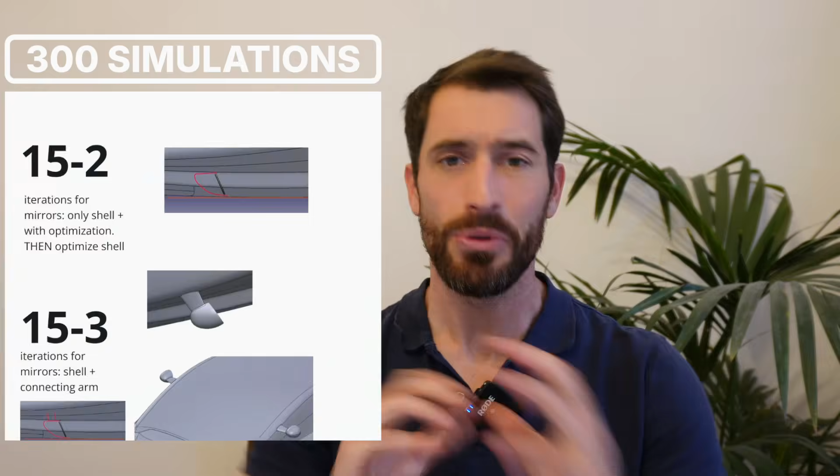Hi everyone, this is probably the most in-depth video you'll ever see on how to cut the aerodynamic drag of a car. We ran almost 300 simulations together with Zweig, a German manufacturer of three-wheelers.

We're going to divide this video into 4 distinct phases. First of all, the hangover: we woke up, we looked into the mirror and we saw that the existing design was actually really bad in terms of aerodynamics, and we were not going to get the range that we wanted. Phase 2, applying makeup, trying to tune and squeeze the existing design to get some drag reduction out of it, but we concluded it's not going to be worth it, we need to go more drastic. So phase 3 is a complete facelift: take this off, put a new one on, and then start to make proper progress.

And then the 4th phase is really nice. We're going to talk about not just the external looks, but also about the inner side of ourselves, and realize that we also need to look at the flow distribution inside to have a good ventilation system.

Now, before we dive in, why are aerodynamics so important? Well, if you are driving at highway speeds, around 70–80% of the energy you're using, whether it's a combustion engine or your electric drivetrain, is to just push air out of the way. So if you can cut the drag by 30%, you can actually extend your range by about 20%. Isn't that massive? It definitely is. So let's dive in.

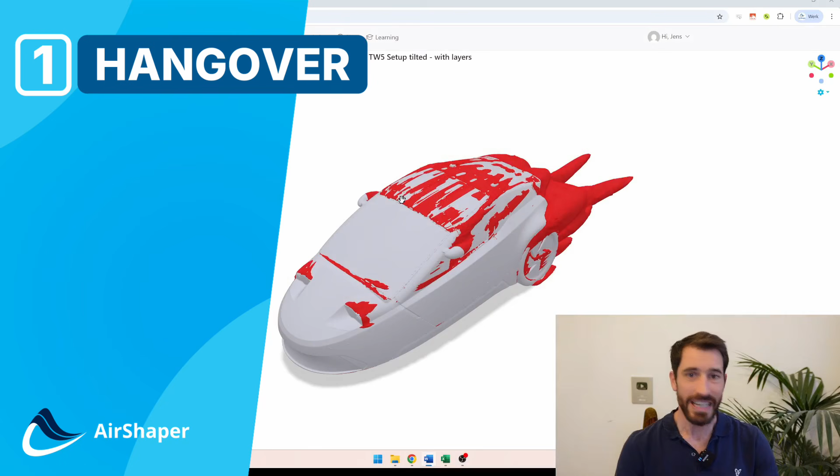So this is phase 1, which is the hangover. We went to a party, we thought our design was actually already good and sound, and then we looked into the mirror, ran an analysis on AirShaper and concluded, oh, this is actually not as good as we had planned. This has a drag coefficient of 0.311.

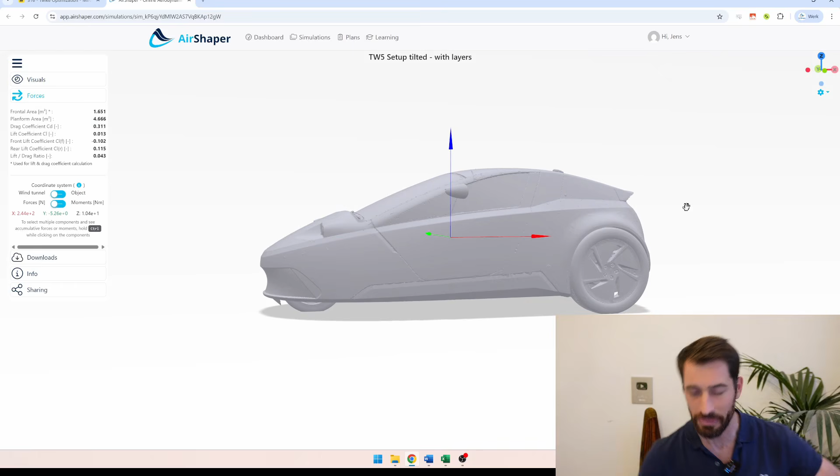We thought, well, this is a wedge shape, it should actually slice through the air quite nicely. It has only 3 instead of 4 wheels. What can go wrong, right? But in terms of aerodynamics, a lot of these things are in the details, and something that can look aerodynamic, like an old Volkswagen Beetle that we tested on this channel as well, can actually be very unaerodynamic due to small changes, due to things sticking out and so on.

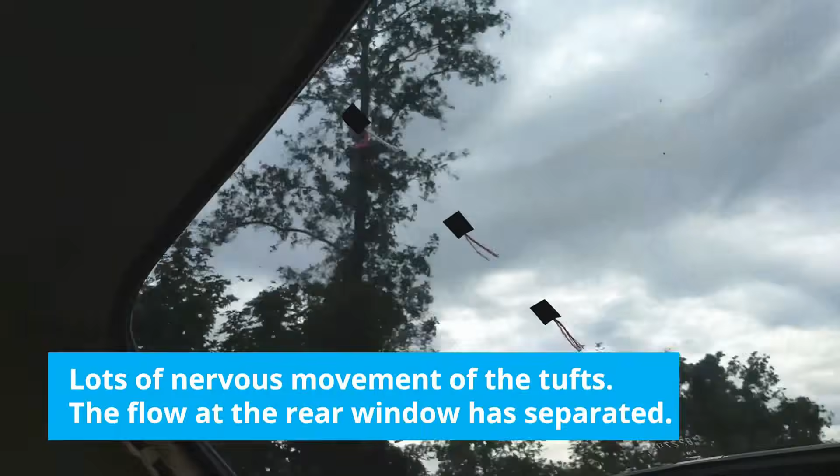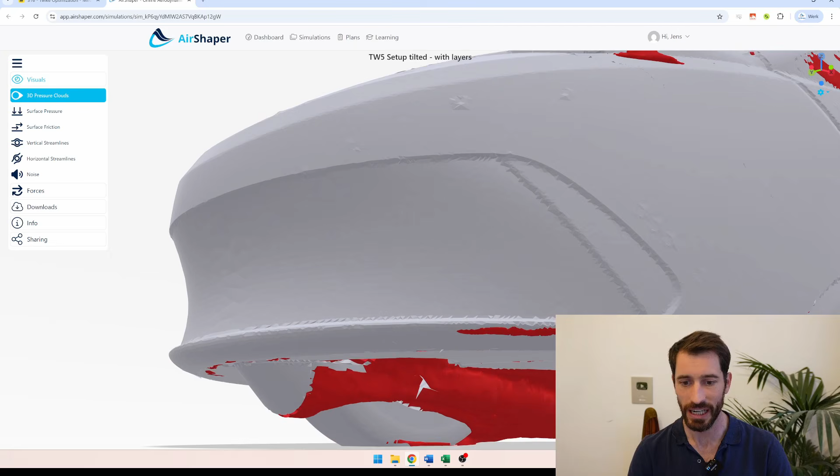So let's dive into the details of this phase 1 and analyze why this is actually not as aerodynamic as it looks. So at the front, we have the front wheel here, and we can see the front splitter. The front splitter is actually quite sharp here, so the air hitting the front and then needing to dive underneath here, this creates flow separation. Not a massive problem, but this can definitely be optimized.

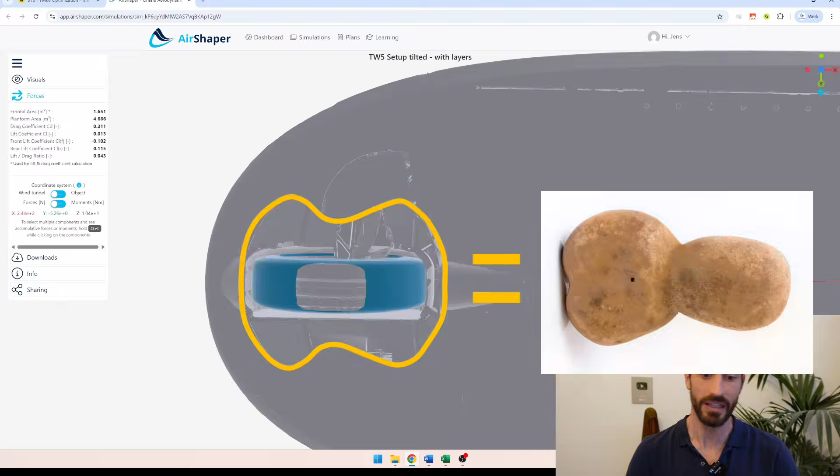Then we have what we started calling, or what Zweig started calling, the potato shape. As you can imagine, if you have just one front wheel and it needs to rotate to steer, you need this cutout here to allow space for it to maneuver around. So this is left open, but if this is left open, that means the flow can enter this area, create a lot of fuss inside this space, and then come out again with a lot of turbulence.

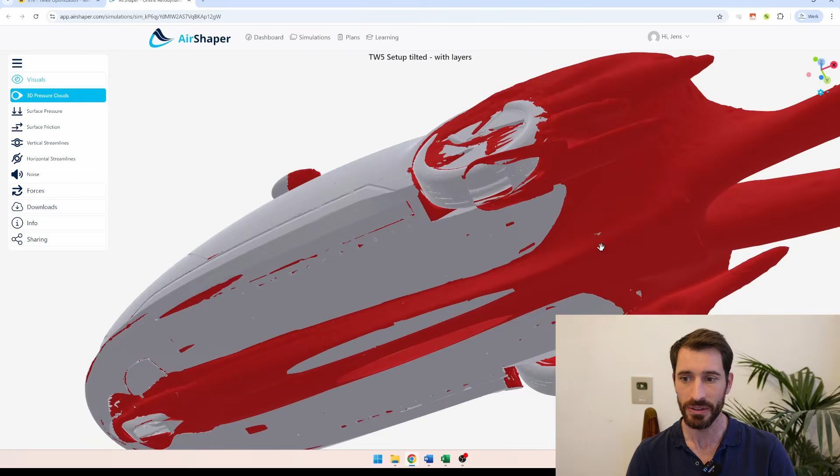You can see that this turbulent wake of the front wheel and the potato shape spills down all the way to the rear of the car and even pollutes what is happening in the diffuser of the car, triggering flow separation there as well. So it's not just the wheel causing drag, it's actually the effect on the rest of the airflow on the car as well. This is a massive focus area.

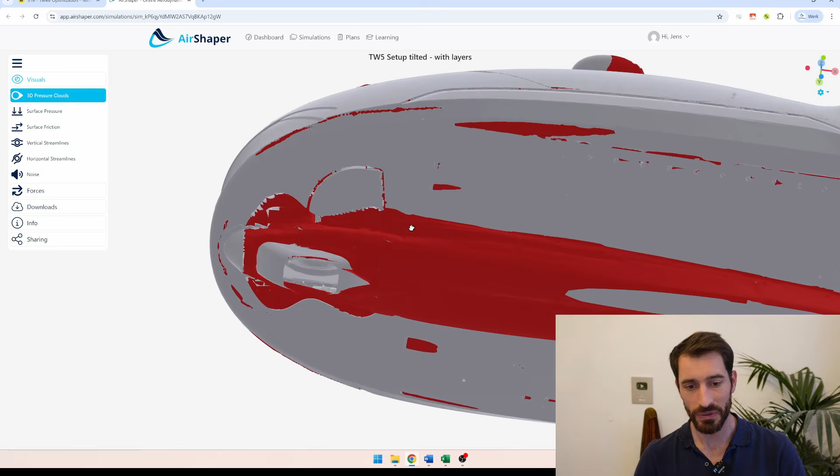There was already an air deflector to guide the air around the tire to avoid big spillovers, but that was not enough. We also saw that there is a lot of geometry sticking out at the bottom of the car, so you really need a flat, smooth underfloor if you want to maintain that momentum all the way to the end of the car, to feed the diffuser and reduce the size of your wake, and maybe get some downforce in the process.

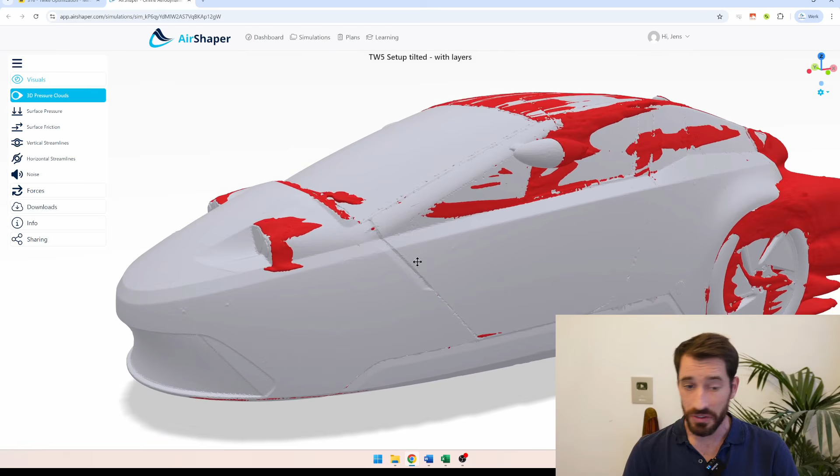What we also saw is that at the headlights, if these are left open, that means the air will hit them full on and then splash out, jump across, jump to the side, speeding up, which creates this low pressure area.

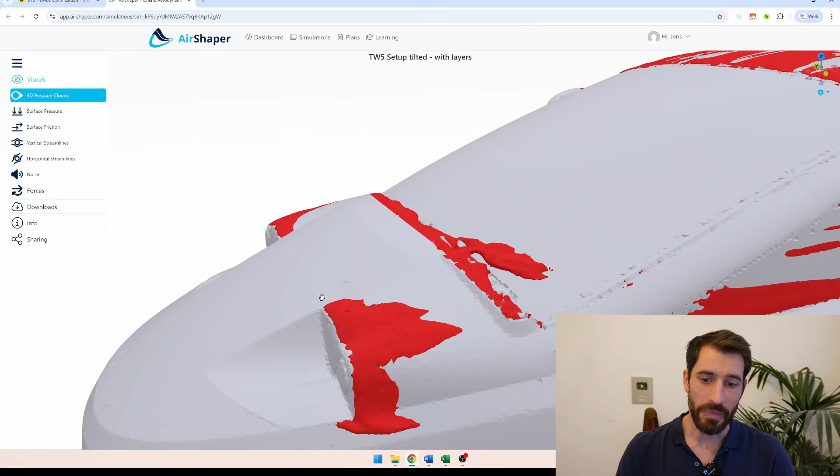As you can see, this creates a wake around the front headlights. Then the air making it past the headlights would jump across this small ridge here and then jump across the windscreen wiper, but it wasn't entirely jumping across. Some of it was still hitting the windscreen wiper, so there's flow separation in this area as well.

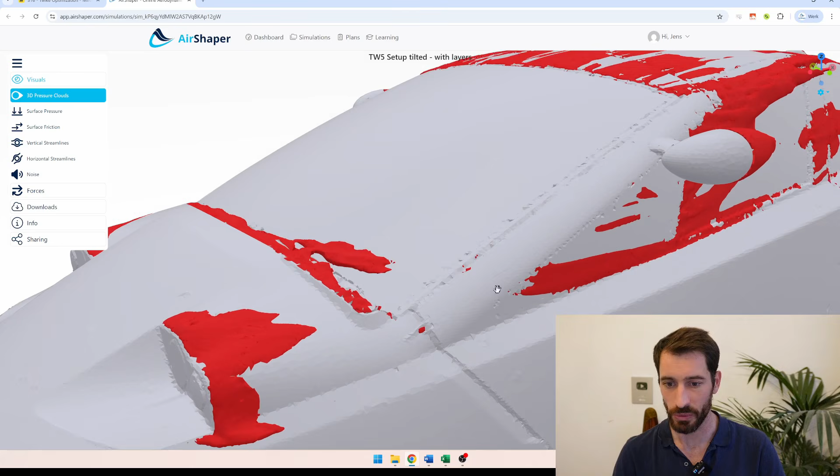Then the flow would curve around the front A-pillar, and even though it's fairly nicely rounded, it was actually still too sharp, and in combination with some small disturbances you would get flow separation. Your A-pillar vortex starts to curl up over here and eventually reaches the roofline.

Then we saw that this B-pillar, which is kind of sticking out, was also disturbing the flow, and the interaction with the mirror was also not really beneficial. You can see that the A-pillar vortex and the mirror are actually joining forces in a quest to increase your drag coefficient.

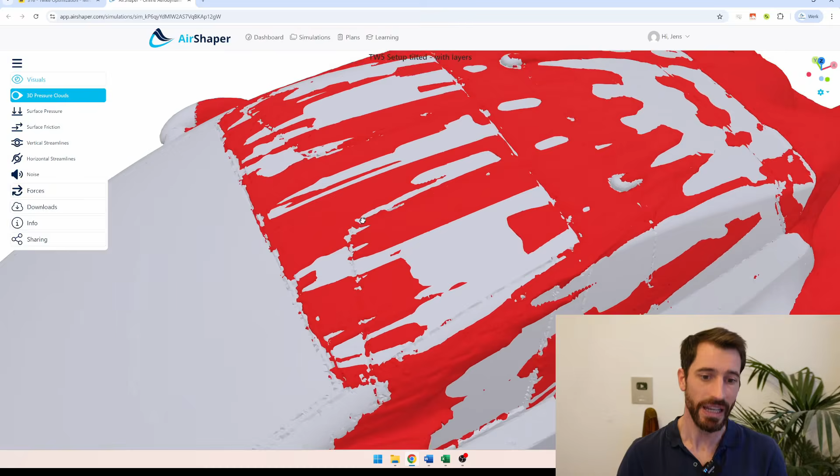Then we see all of this dirty mess here at the top of the car. Yes, we did run simulations at higher accuracy, but the bulk was done at medium accuracy. Even at medium accuracy, you would spot that these gaps between the windscreen and the bodywork, and other panel gaps like here.

So these are actually kind of like gullwing doors. If I'm not mistaken, they trip the flow, and this actually creates a dirty layer of air on top of the car, which travels all the way downstream.

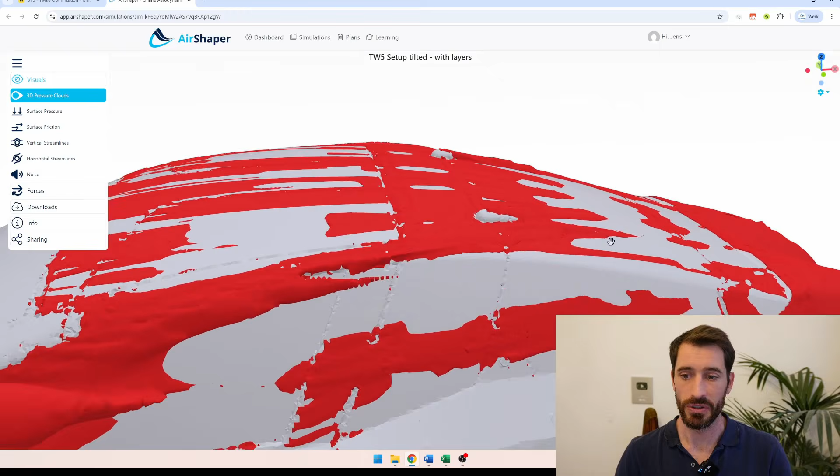Then there's the added problem of the hinges. So if you want to open up the trunk here, these are the hinges. And then we have the B-pillar, which again, because of the panel gaps and things sticking out, creates flow separation.

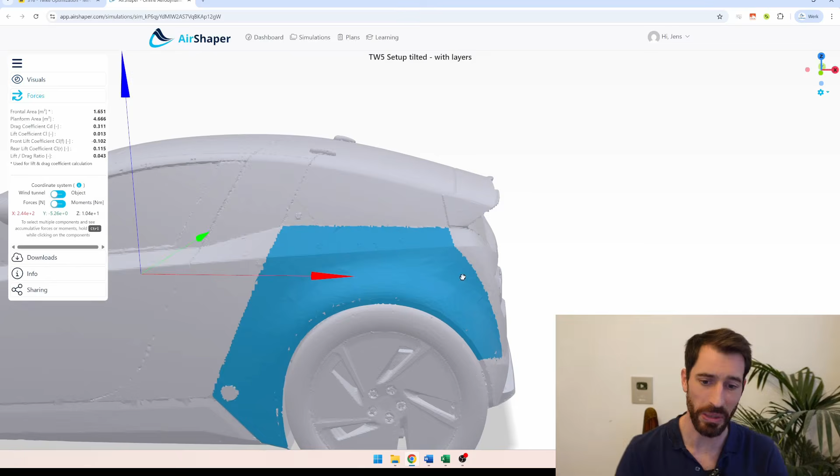Then we had a very interesting, challenging area here. At the hips of the car, they curve down nicely. It's a very short overhang, which is nice if you want to park your car in a tight spot. But in terms of aerodynamics, this sharp downward curve makes the air want to stick to it, and this accelerates.

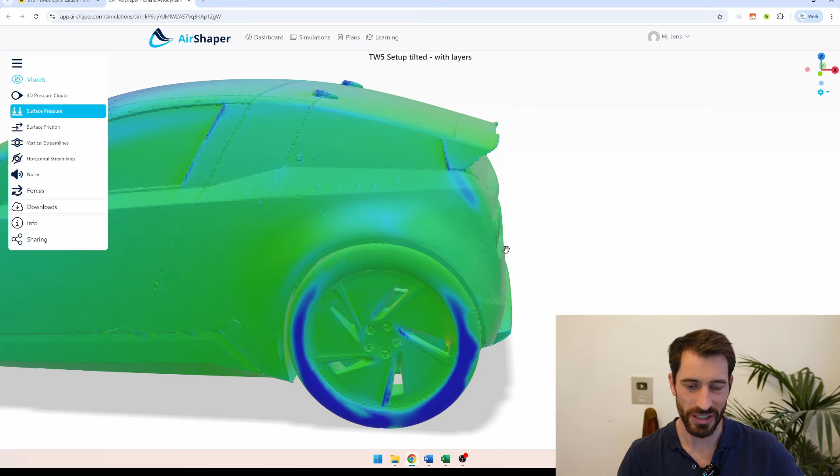Just like on the original Audi TT, which had a nice rear end, the air would want to stick to it, and this low pressure air, because it speeds up, separates at some point. This low pressure area that you start to see here on the hips creates a kind of suction effect, pulling the car backwards. So that is a key area that we improved as well.

Of course, the wheels have their own wake, so the air hits the wheels and then creates a wake around it. We can see that there's flow separation inside the diffuser, so at some point across the entire width, the diffuser features separated airflow.

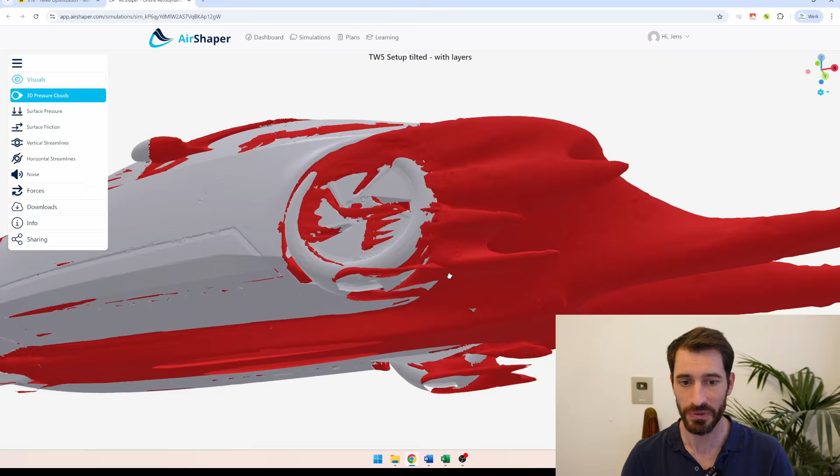And then we have the roofline. We did have a spoiler already to guide the air downward and into the wake to reduce the size of the wake. But again, if you have the wrong curvature here at the top of your car, this will create a suction effect, create lift on the car and create drag, which is not what we wanted.

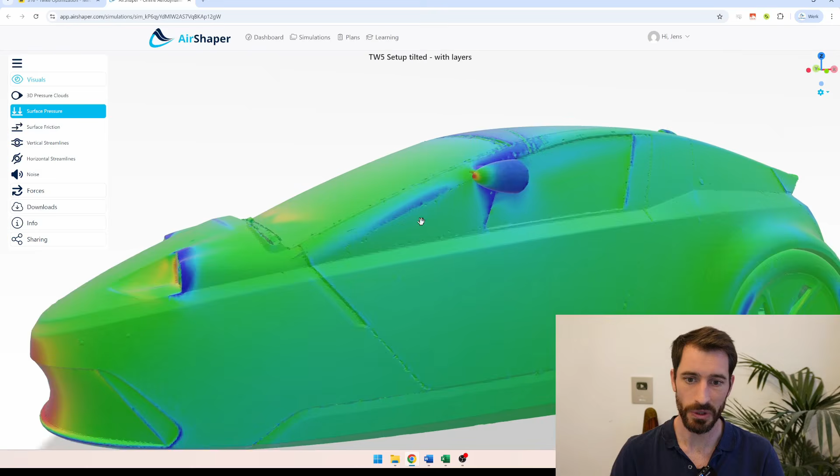So just an overview: this is the pressure map, this is the friction map where you can spot areas of flow separation. The wheels themselves, of course, the rear of the car, fully separated airflow, which is normal. You can see the effect of the hinges traveling downstream, this turbulent, separated airflow.

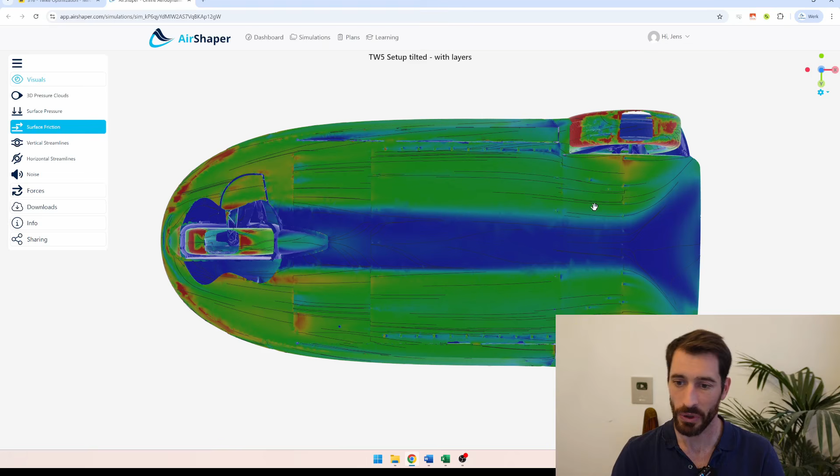This is the dramatic effect of the front wheel, the central wheel, so all the way down to the diffuser, separated airflow, and then this separation spreads out left and right as the flow cannot maintain momentum and attachment to this surface.

So massive challenges ahead. That means for the second phase, we were going to apply makeup to this design. The scope was clear, this is our design, let's now tweak it. The goal was a drag coefficient of 0.22, coming down from 0.31, which is a massive challenge, and we were going to do this with this design. So bear with me as I walk you through the efforts that we did.

So if we want to look at this, we actually ran a design advice simulation first. Now this is a special simulation which still uses mathematical equations. It's not based on AI, it doesn't need to be trained or anything.

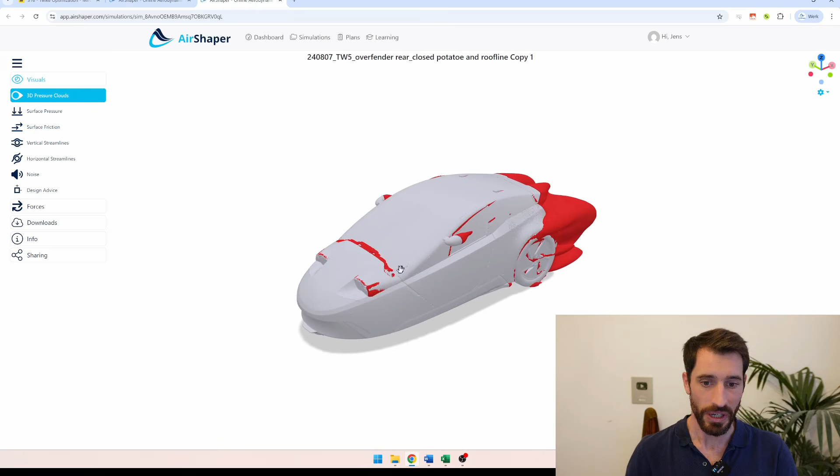It just directly uses an extra set of equations to point you in the right direction. What you see here in blue and red is a color map indicating where you should move the surface inward and where you should move it outward. Blue is inward, red is outward along the surface normal, to reduce the drag.

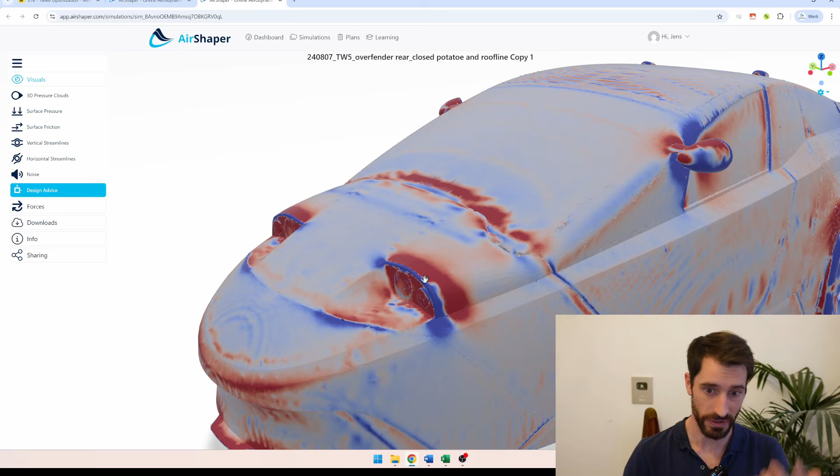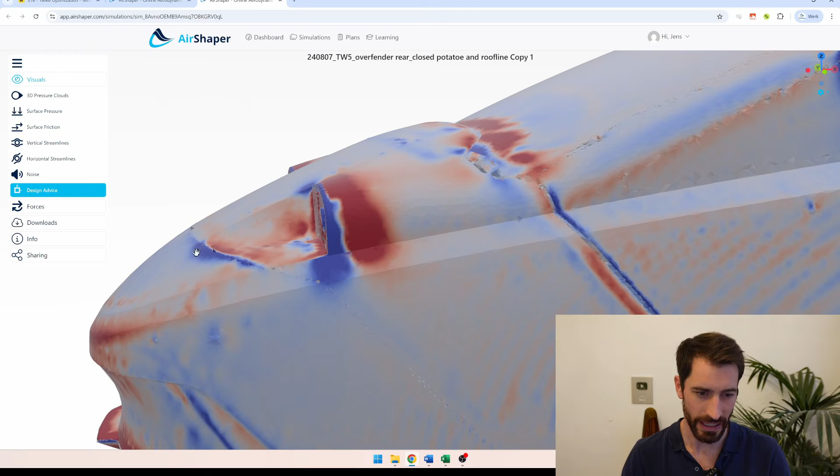If you want to reduce the drag on the headlights, you actually want to reduce this sharp edge at the front, push it down, which is the sharp edge here that the air needs to cross. Then you want to have this bulge here to provide a soft landing zone for the air. So push this edge down, push this up, to give a more rounded shape. You have a sharp edge here, so again the software is telling us blue means push it down, and the ramp behind it, push it upward, so you have a softer transition.

This really provided us with massive clues as to where we could improve the aerodynamics. Also the front wheel deflector was showing a lot of room for improvement, so it wanted us to push this in, push this down to increase the deflector effect, and close this gap here to make it more continuous, which is what the red is telling us.

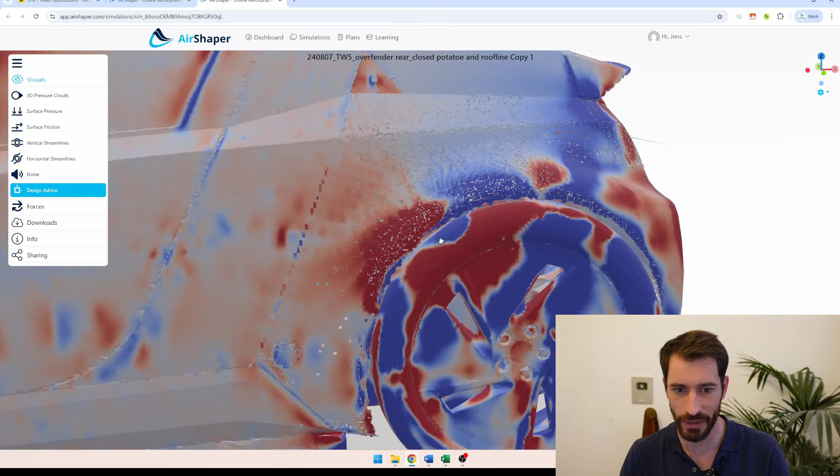Around the mirrors, a lot of room for improvement, just push downward on this surface here to make the flow work better with the A-pillar vortex. This area is red to indicate we should shoot the air a bit more across the tire to avoid mixing effects there. The spoiler was telling us to put this downward and then give it a small kick at the rear to recover some of the pressure.

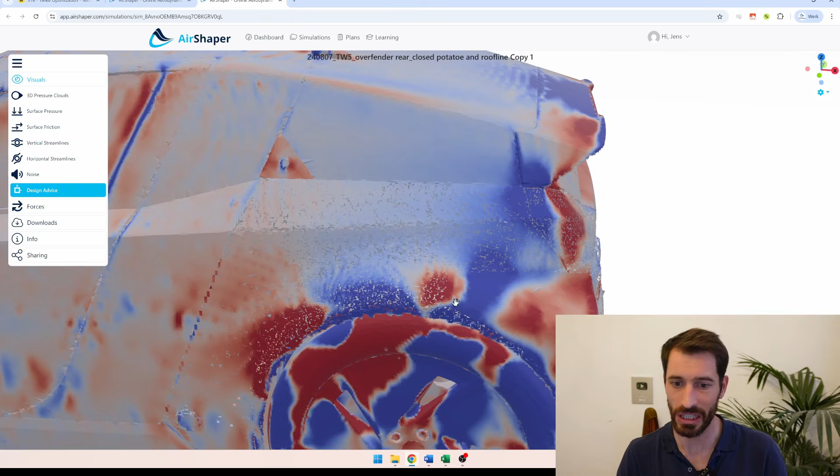A different area on the sides here, because the central flow is different from the side flow. At the hips, a lot of suggestions here on how to tackle that flow. The diffuser, as we mentioned, the air deflectors which are there. So lots of room for improvements.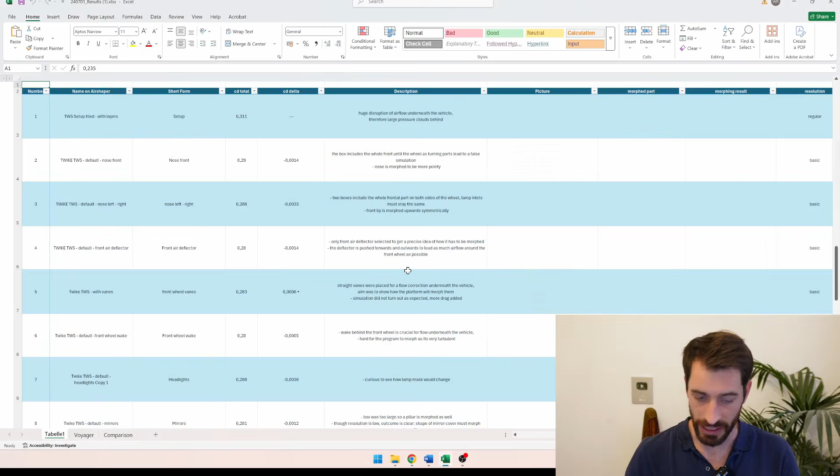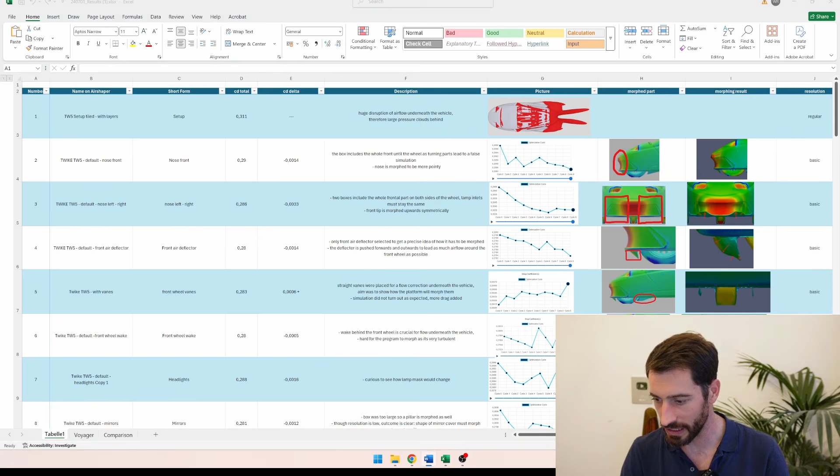To do this, together with Twike, we went through a massive number of simulations. This Excel is just a very small overview of what was done to run improvements. So what you see here is an overview of the automated morphing simulations that we ran on the car. This is the first — we allow the software to automatically optimize the shape of the car.

So what we asked here is, please work on the front of the car, and here you can see that it extended the nose to be a bit sharper, to pierce through the air and reduce the pressure buildup around the car. This gave us a marginal improvement, but it's something.

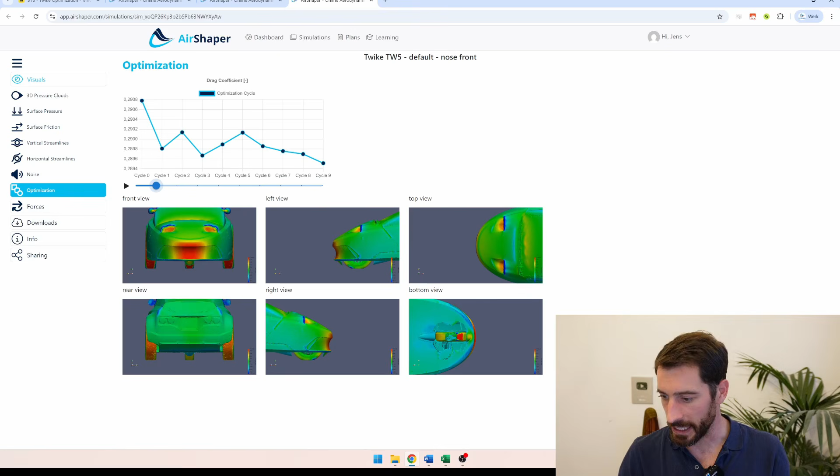Then we did the same for what we call the front air deflector, which is a small bit that helps shield the front tire. If you look at the optimization, we can again see some minor improvements. If you push this outward more forward and keep this small ramp here, you push the air more downward and away from the tire, and you get again some marginal improvements in the drag.

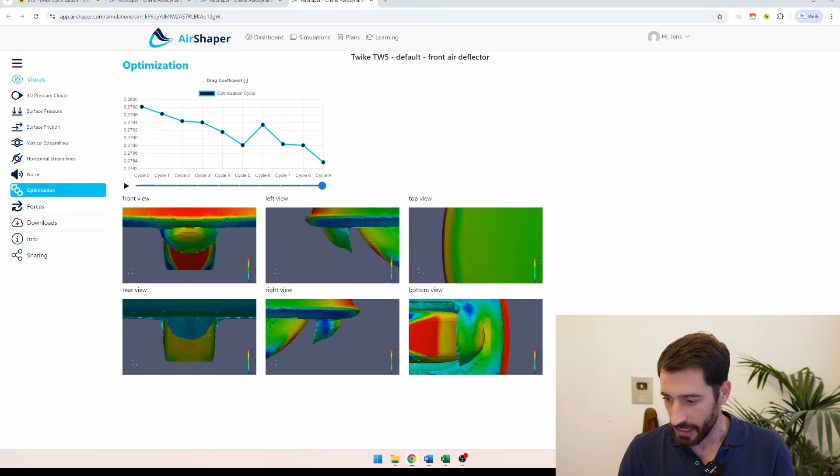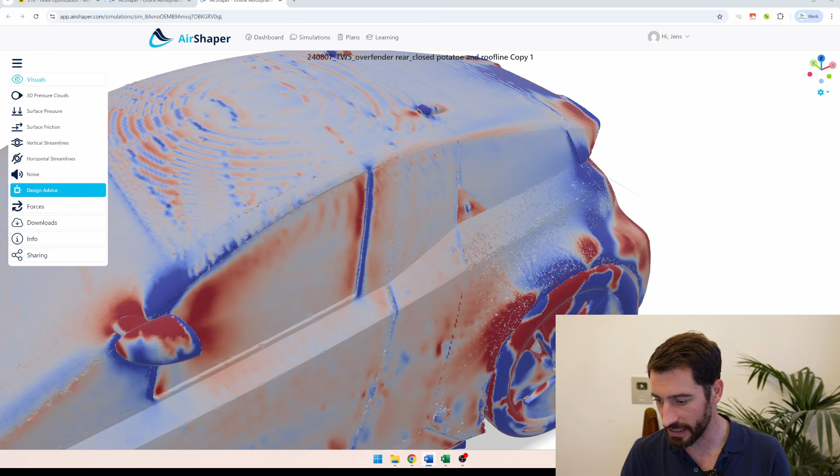Then what we did is run an optimization on the roof, also a very critical area. If you look at the Toyota Prius, for example, or a Tesla Model 3, you can see that they have kind of a cab-forward design and then a long, slender slope for the rear roof. In this case, we're kind of stuck with this backward cabin design, cab-backward design, where the nose is longer than the rear of the car.

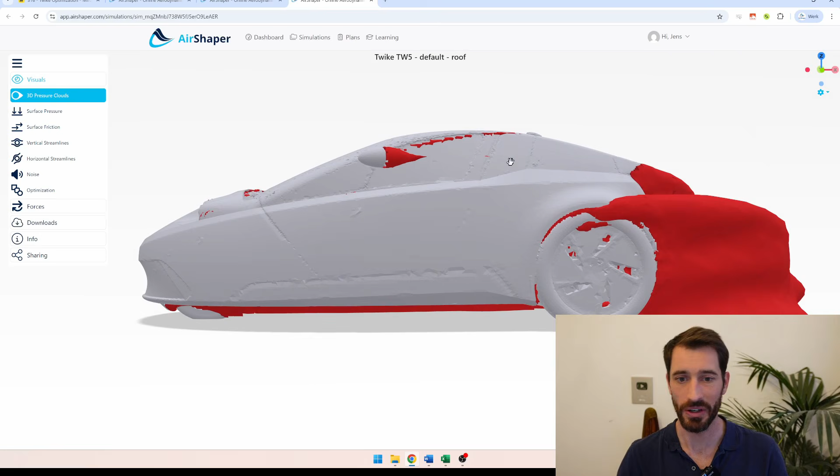So that is what we had to work with, because the windscreen was a thing we could not touch. These parts were already carved in stone, so we had to deal with whatever we could starting from this hinge line. So we ran an optimization, and the software told us to lower the spoiler but still provide a little kick to it. It hinted at a certain potential for drag reduction, definitely sizable, 0.007 in terms of drag reduction.

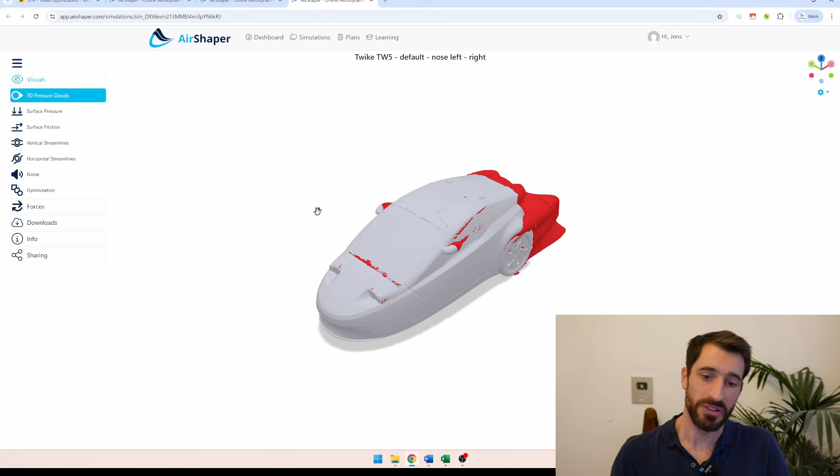Then what we did is run an optimization on the front splitter, left and right of the nose. We wanted to see what would happen if we changed the geometry there. Very interestingly, the software was pulling up the splitter dramatically, which is counterintuitive. Most people want to keep the splitter low, sticking it out forward to prevent air from getting underneath the car. But if you can get more air underneath the car, you provide more momentum, which really helped in our case to close the wake behind the front wheel.

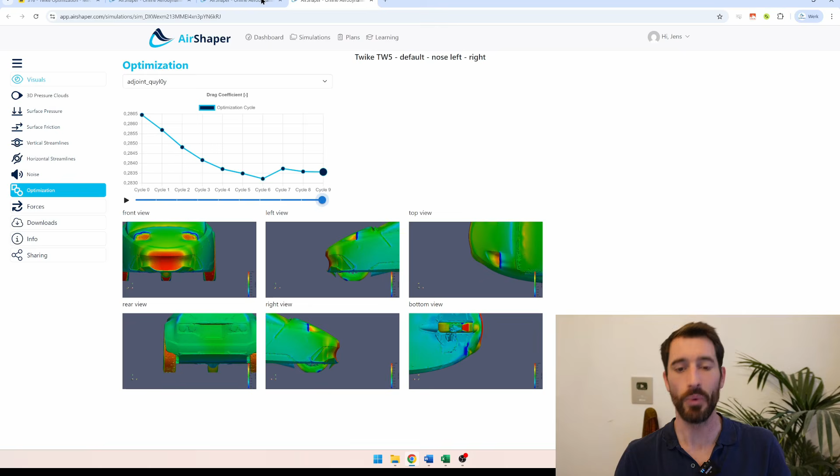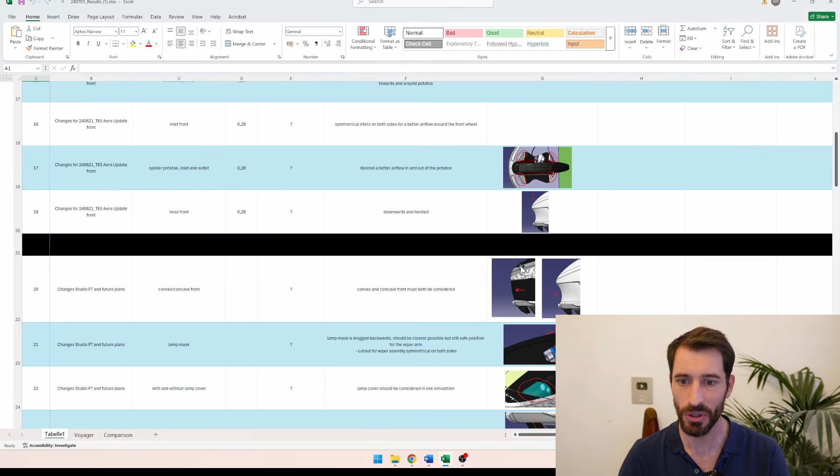Now, all of these things combined, we went from 0.311 to 0.28, which is still not what we wanted. After all of these small modifications, that is still what we were left with. So then for phase three, because we wanted to go from 0.28 to 0.22, which is still a massive challenge, the customer Twike actually concluded - normally it's us telling them, but they told us we need to be way more drastic. We need to get the drag down, and we need to question everything we did so far.

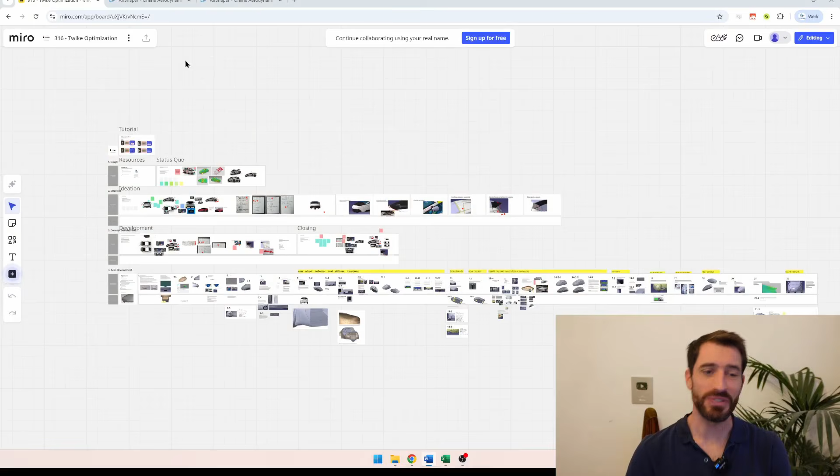So we went for a massive brainstorm session together with the guys at Voyager, friends from way back who run a design agency here in Belgium, and we got to work.

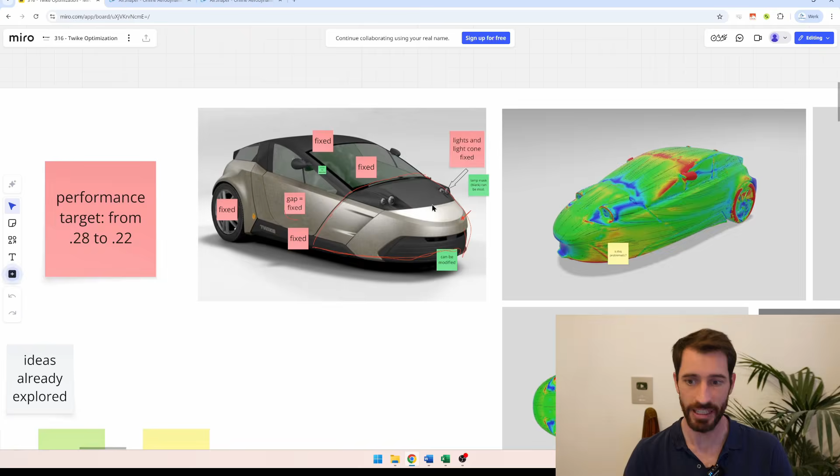So this was the clear brief: we want to go from 0.28 to 0.22 in terms of drag coefficient, 0.28 to 0.22. Which are the areas that are fixed, which we cannot touch because they've already been carved in stone, already have molds and so on, and which are the areas we can still modify? What can we do to actually bring down the drag coefficient?

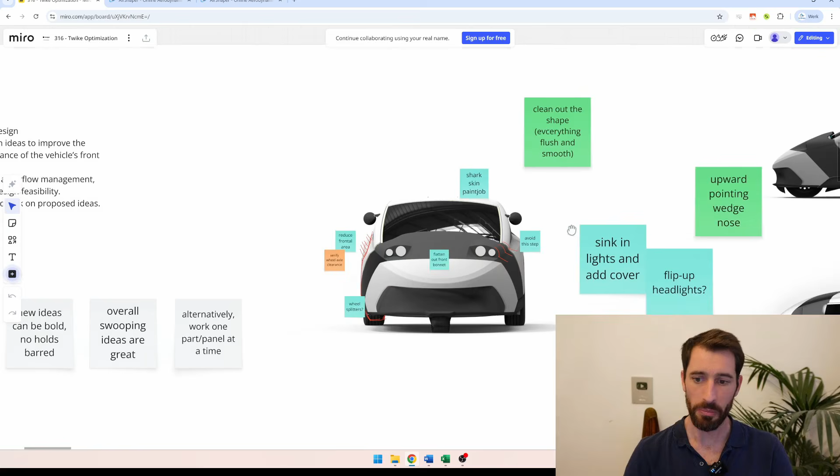So then we started brainstorming - digital brainstorm on a digital whiteboard, placing virtual post-its on different areas. Can we reduce the frontal surface area? Can we change the shape of the cockpit? Can we extend the flanks for aerodynamics? Can we change this part here? Can we do something like the Chiron, with an open rear to ventilate some of the wheel arches?

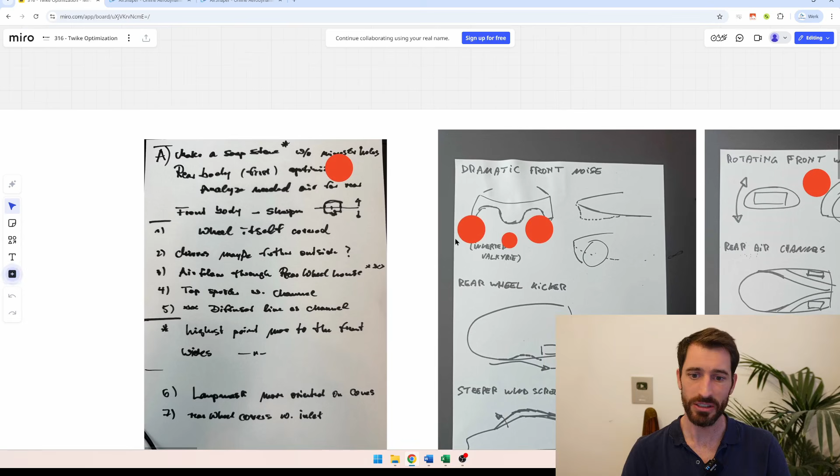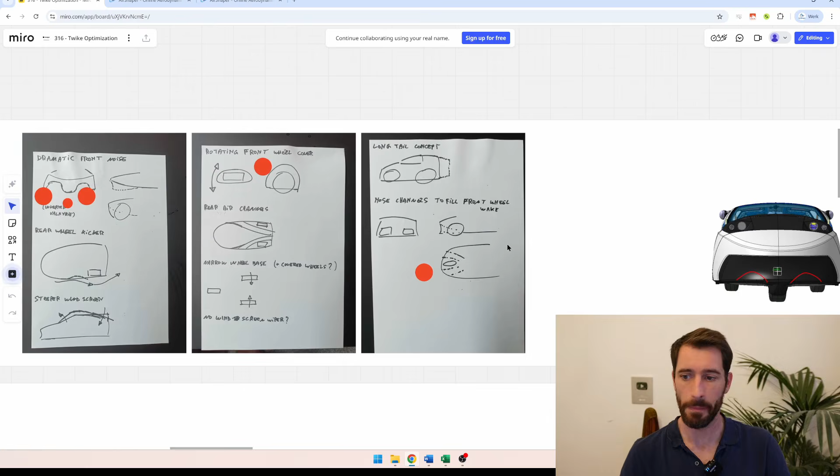Can we extend the length of the car like a long tail, which is what they do for speed record cars? Can we apply two massive tunnels at the front of the car to feed some high-energy or high-speed air next to the front wheel to reduce that wake? Can we use internal channels to feed air through the bodywork of the car, and so on - these would be the channels.

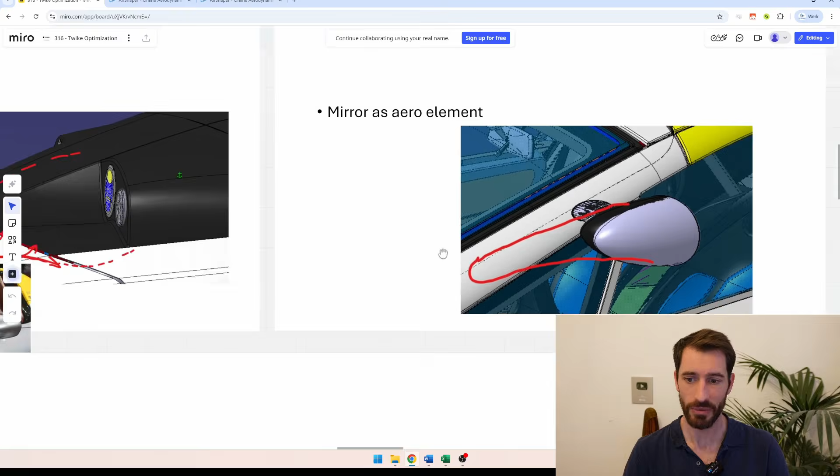So then we prioritized the things we wanted to analyze. Can we put a small gurney flap to make the air jump across the front lights and land at the right spot without creating drag? Can we integrate the mirrors into the A-pillars? Can we put seals on the panel gaps? Can we change the geometry of the spoiler, and so on? Loads and loads of changes.

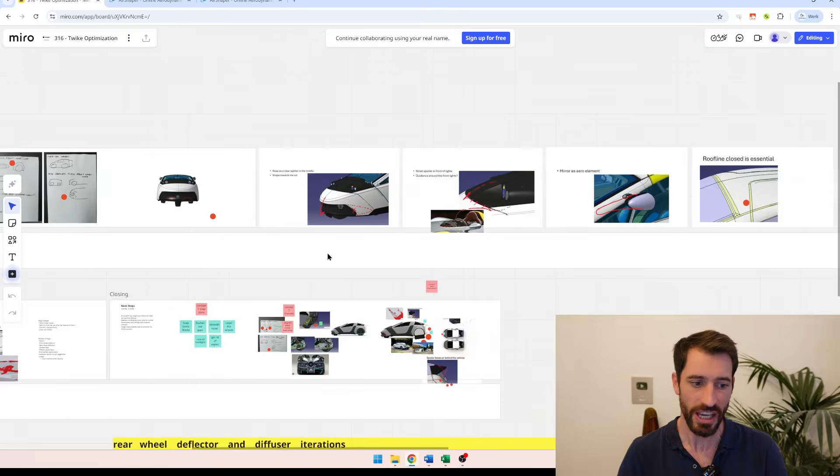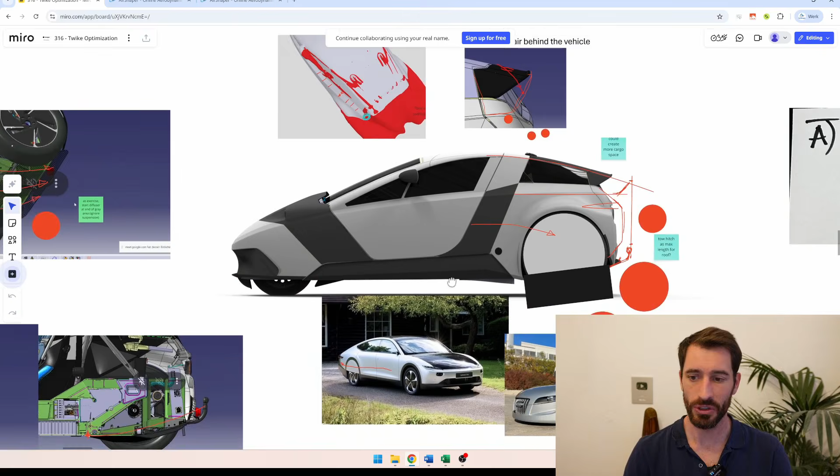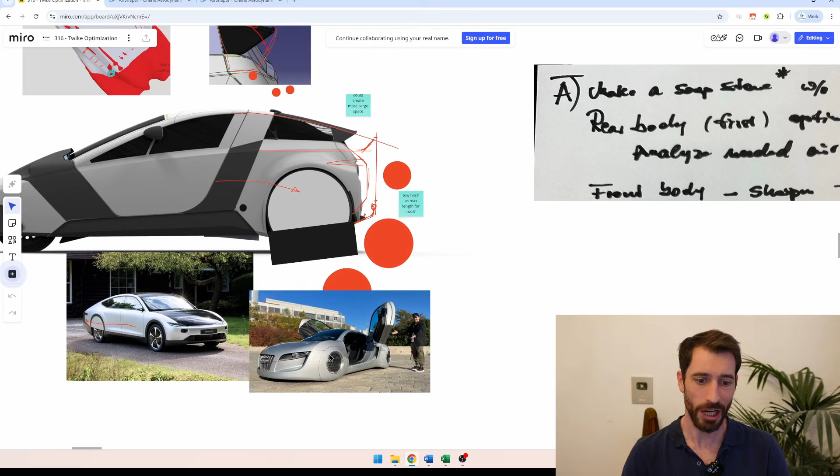So we started playing around and came up with numerous developments. Some examples: we looked at fans, diffuser geometries like the almost straight diffuser. Is that the best solution? Should we go for more of an S shape, like what you see on the Gordon Murray, even though that one has fans? Can we change the nose of the car? Can we do something about the length? All of these things were questioned and actually executed.

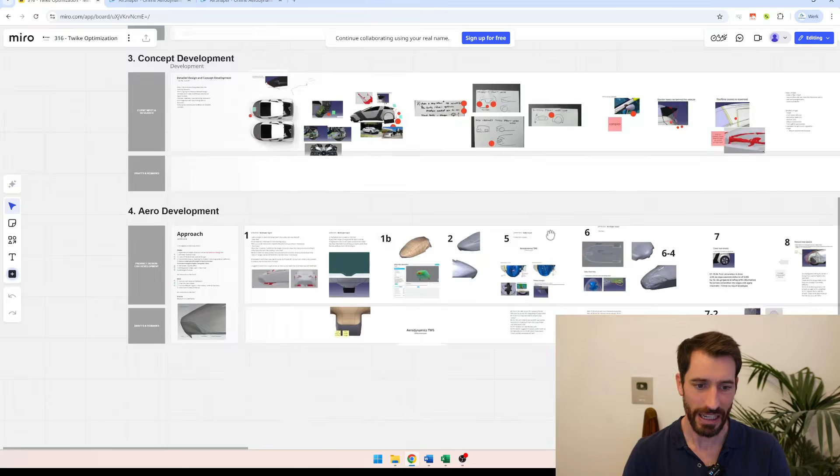Here you have just a small overview out of the 280 simulations. You can see all of the things that we did, and we actually went back to the basics. At some point we said, let's just go to a very basic shape, because we don't know, with all of the details, which part is having which effect.

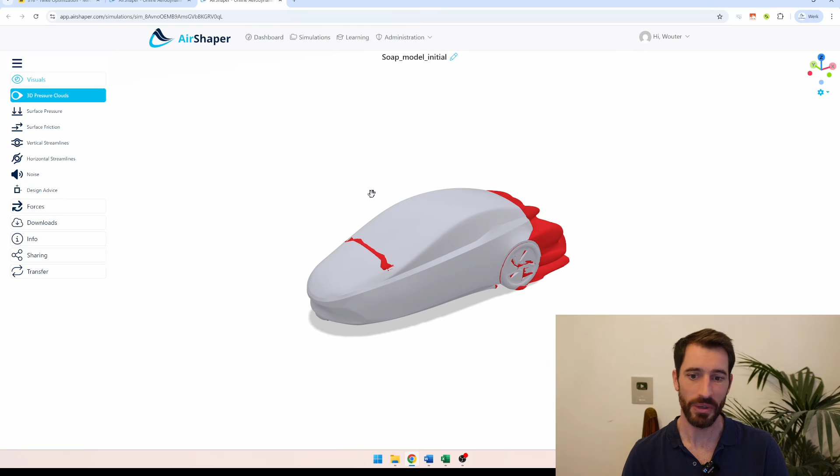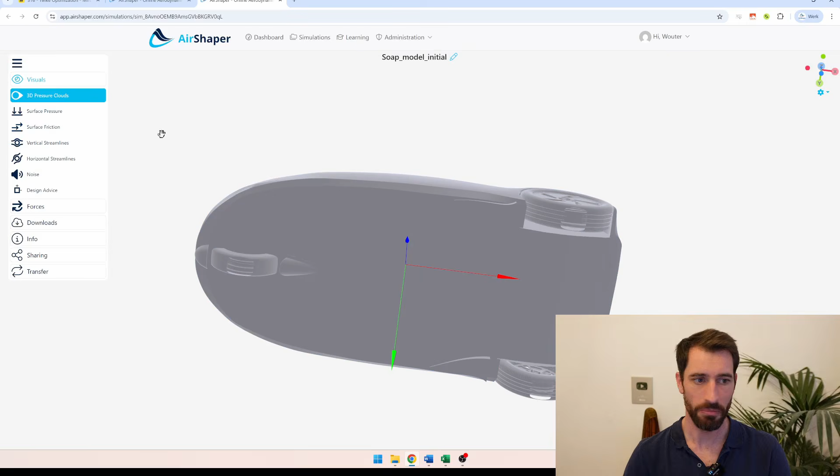So the first thing we did for phase 2 is what they call the soap model. It's called a soap model because if you use a piece of soap often, it becomes nicely rounded. We wanted to start with a very clean shape, only a closed shape at the wheel, so we don't even have the potato shape, but we did have the basics in there, the drag around the wheels and so on, just to see what's theoretically possible if you take away all of the detail.

And of course we wanted to go beyond this, because this had a drag coefficient of 0.262, which is down from 0.28 on the detailed car design. But now we had to start modifying this one as well.

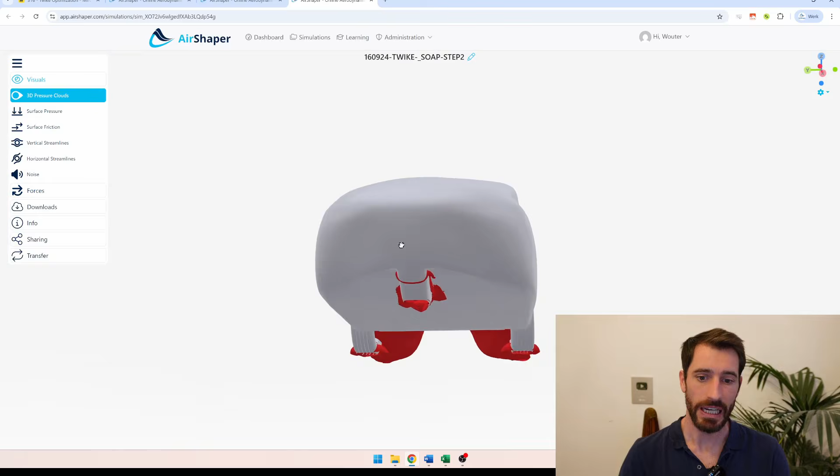One of the first things we did was to work front to back on this car. We ran an optimization on the nose to find out what happens if you add channels, like we saw in the optimization, to provide clean airflow underneath the car instead of pushing it away left and right, like we saw on this one. This one pushes air left and right, while this one has a very rounded shape to promote air to go underneath the car and fill the wake behind the wheel. The effect is massive.

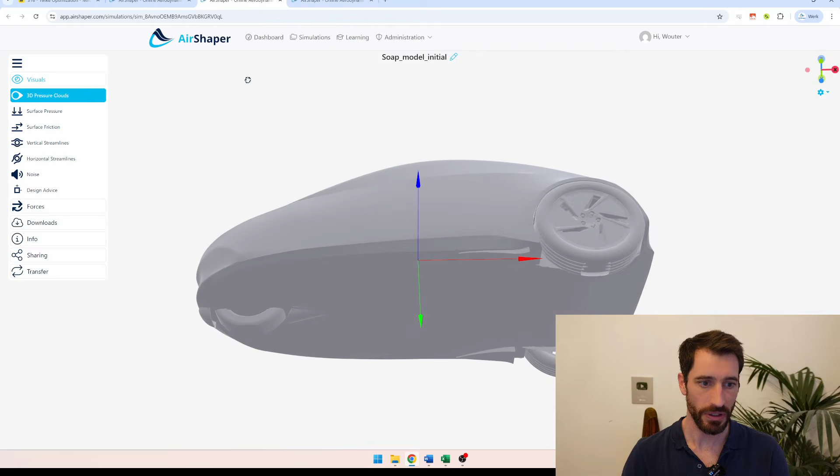Just look at this simple soap model - we were able to maintain a very closed shape, and more interesting, you can see we have a nice energetic flow going toward the rear of the car. Doing this brought the drag down already to 0.248.

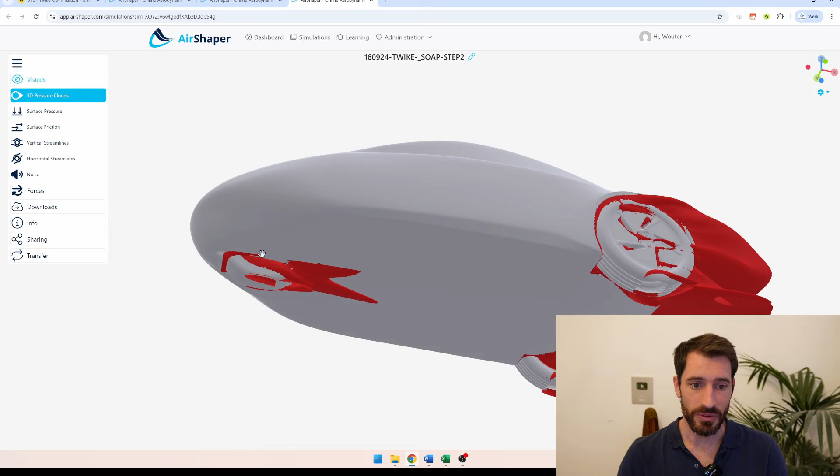Then we had to put back the potato shape. Putting it back increased the drag again to 0.266. So it felt like we were back to square one, but that wasn't the case.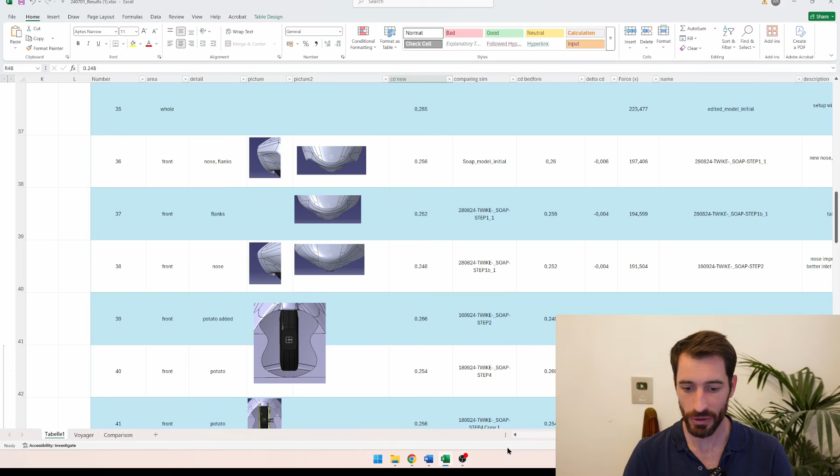We started modifying the potato shape by adding nice rounds to this cutout, so that the air diving into the potato shape would land on a soft spot. Here we look at the dramatic effect of the potato shape - if you put it back, you can see the wake increases again and this area becomes filled with dirty air.

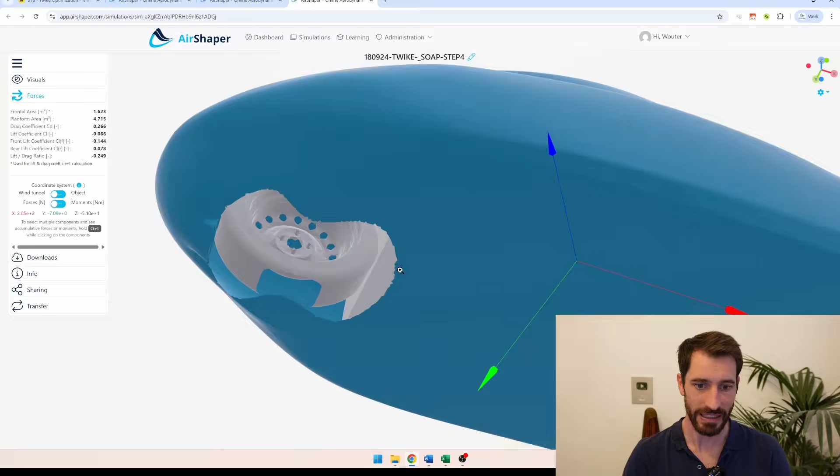What's happening is the air gets trapped in this cavity, then has to exit across this edge, creating turbulent airflow, which again gives you that drag zone that extends all the way to the diffuser. Not as dramatic as before, but there was room for improvement.

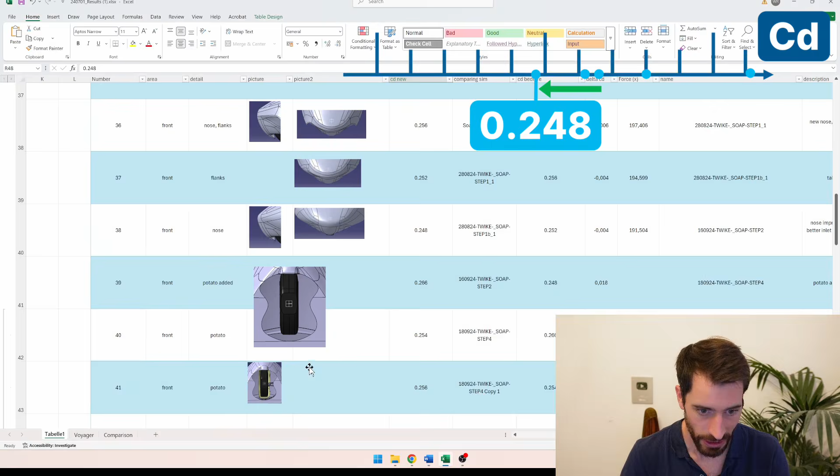Optimizing this shape with nicely rounded edges on the potato brought the drag back down to 0.248, for example, in this case.

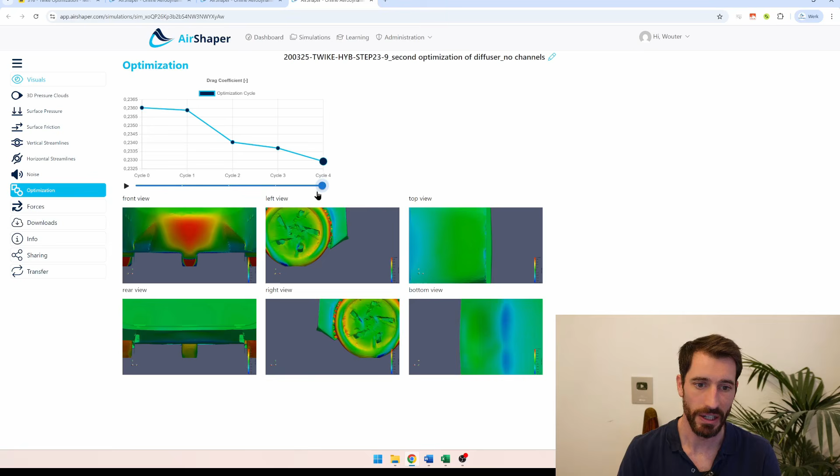Then we also worked on further optimizations of the diffuser, but this time applied to this clean shape. If you look at the optimization here, we saw there was a lot of room for improvement, going from 0.236 to 0.232 - slightly higher - and again the software was telling us to bring back this dent in the diffuser, which is the S shape that we saw.

Then we started doing the exact same thing on the roof of the car, and here you can see the final result of all these modifications combined. I'm just showing you the tip of the iceberg.

We looked at the mirrors, the A-pillar, and the hinges on top of the car, and we were left with a drag of around 0.22. Slightly higher, but we're still going to push it further down on this car. So really dramatic improvement.

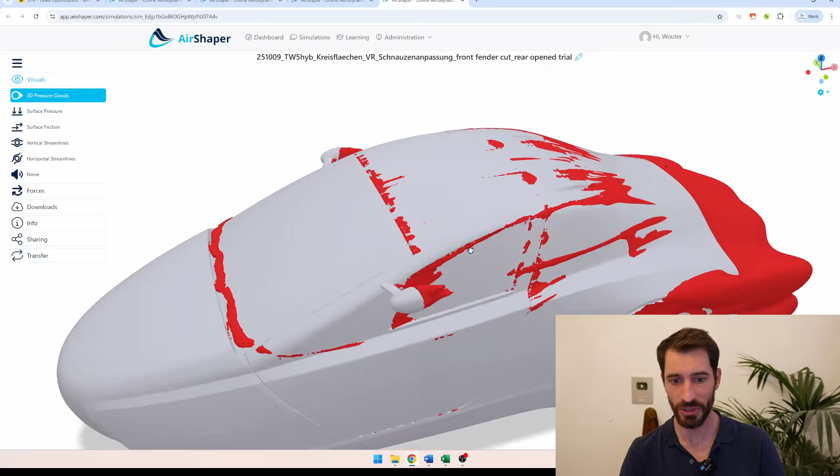We have these nice channels side by side here, funneling air underneath the car. The windscreen wipers are nicely shielded. Panel gaps have been reduced a lot. Mirrors have been optimized, and we've optimized the diffuser massively.

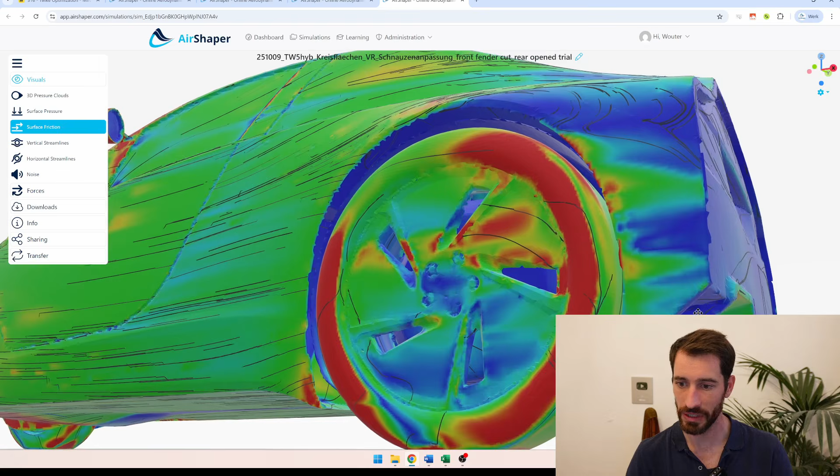What we did in the end was play around with channels on top of the suspensions and so on. But in the end, the conclusion was the simple shape with the suspension tucked inside was the best one. So we have a shape of the diffuser which goes up like this and then flattens out again, which is the S shape we also see on top of the car. This really helped to reduce the drag dramatically.

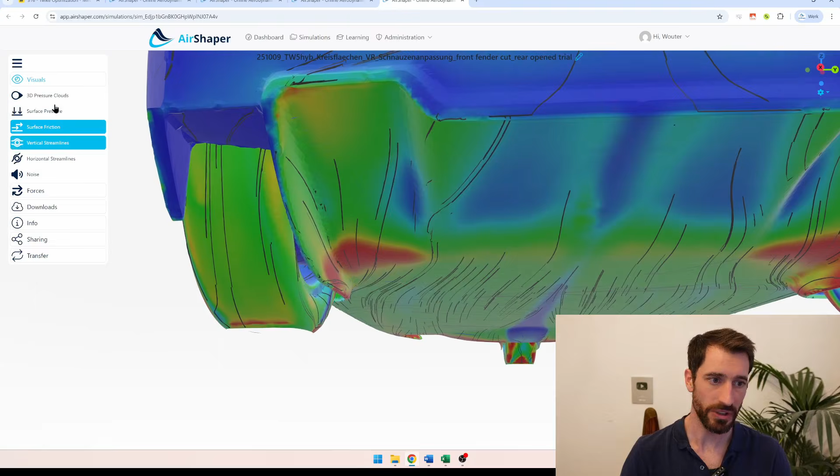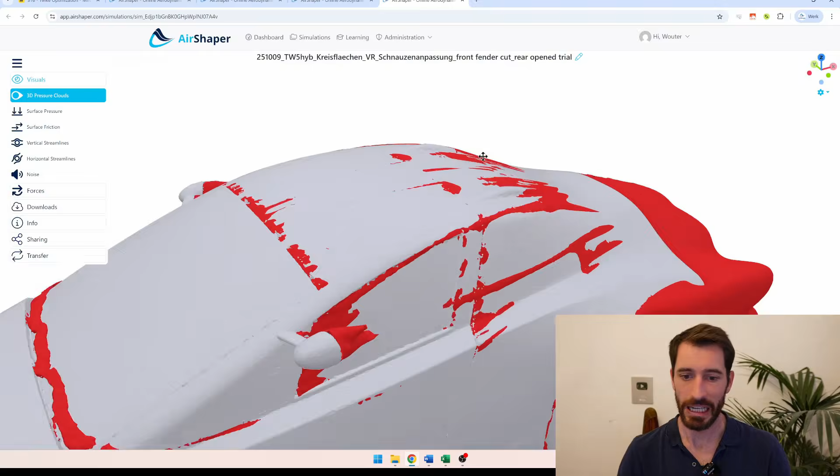We also have sidewalls which provide a shielding function between the spillover air of the tire and the diffuser, so the spillover of the wheels stays close to the ground and doesn't pollute the attached airflow in the diffuser. We had to work our way around the option to have a trailer hitch on the car, which was a really interesting challenge, since we had a hard point here because that's where the frame of the car was positioned. So a super interesting project where we cut the drag by a dramatic amount.

And now, after all this facelifting work on the exterior, we're going to come to the really nice truth. It's all about what's inside, right? So let's have a look at the internal flow, because now we want to optimize what happens when you push air into the cabin. How does it actually distribute along the cabin volume, along the passengers and so on. Let's have a look at that as well, as a bonus.

So here you can see an analysis of the ducting system. What we're doing is applying inlet air at a certain flow rate, and that flow will distribute among the different outlet channels. Over here, these are the outlets that will actually defog or demist the window on a cold day.

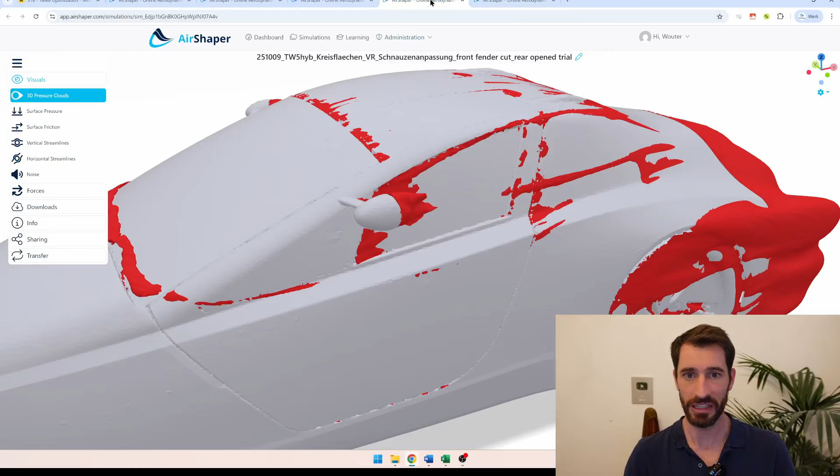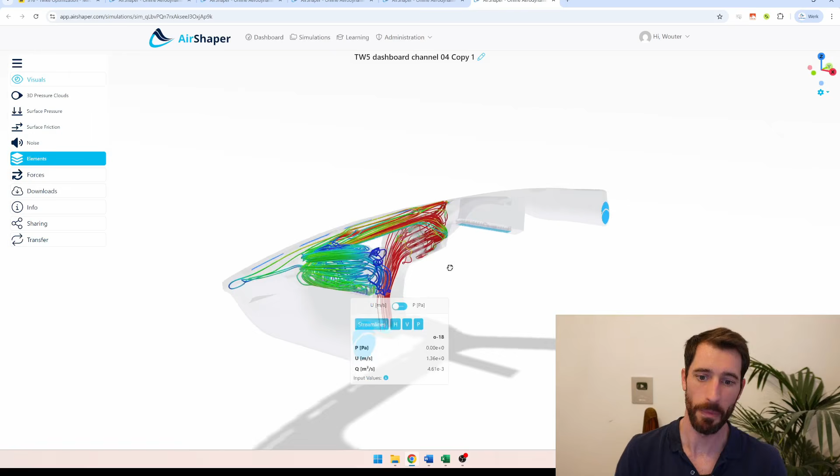So you have to imagine this is the car, and this ventilation system is somewhere over here, and these slots of air are actually right underneath the front window. That's what we're looking at here. So the front window is actually over here, and this is where the air comes out. We also have these ventilation holes, just left and right of the front passengers, and then these ones go down towards their feet, that area.

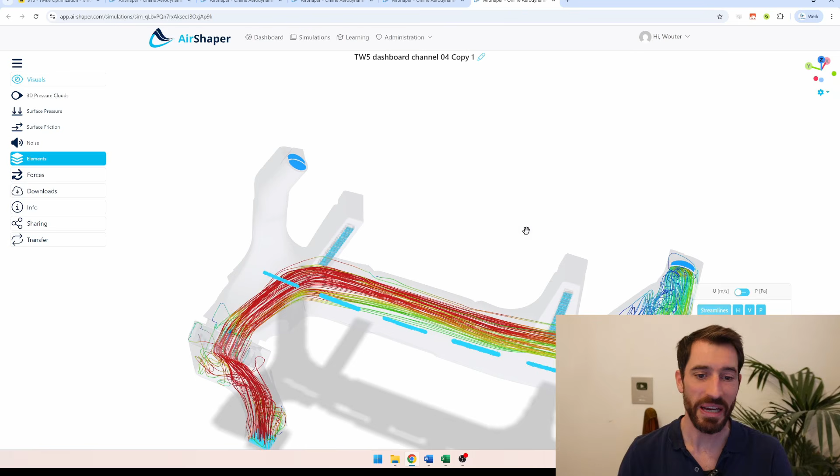So what we can do with just one simulation is analyze the flow distribution. This is already iteration 4 or 5, where we can compare the flow rate on this channel, which is 5.7 liters per second, and this one is 4.9, which is already way better than the initial concept, where we had deltas of 20, 30, 40, 50% between those different openings.

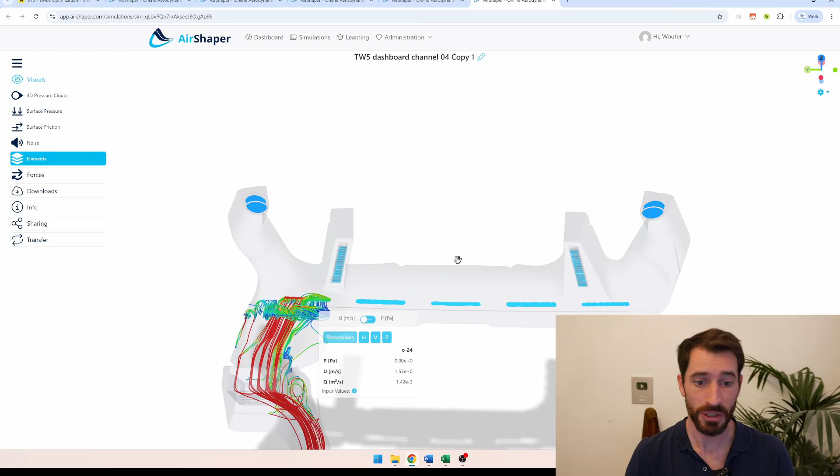We can also analyze how much flow rate we have on one channel, and as we move along the length of this channel, we can see that this varies, with different flow rates. So we're still in the process of further tuning this to make it as equally distributed as possible, to give you the fastest possible time to actually defrost or defog your window.

And then we want to have the same amount of comfort for passenger and driver. We want to keep your feet cool or warm depending on what you want, and so on. So that's it in a nutshell, the massive amount of work that we did, and we went all the way from a drag coefficient of 0.311 to 0.22, which is a 30% reduction, meaning 20% more range.

So if you're going on a city trip, that means you can just drive to the next biggest city on the same battery charge. How incredible is that?